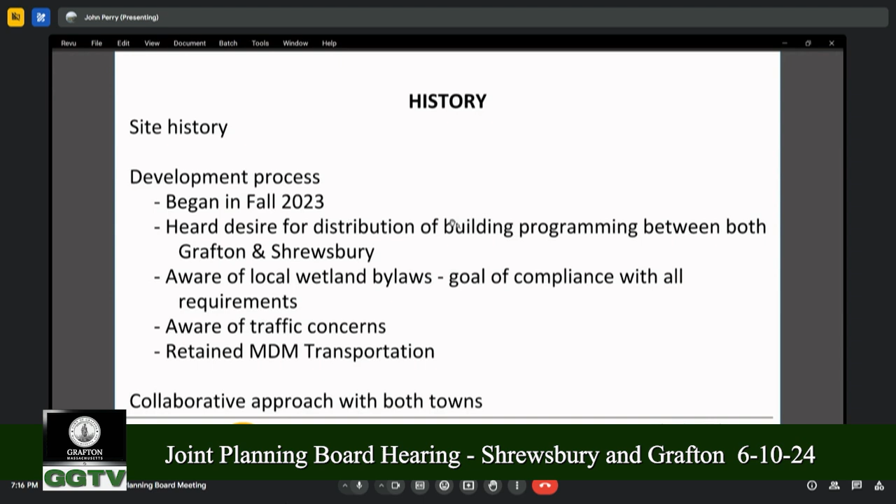So we have been working since the fall to try to meet those concerns in some fashion. As a result, we've got a fairly unique shaped building. It's not your typical kind of Lego thing. It's a little bit more of a spaceship kind of building that the development team has undertaken.

We've had extensive discussions already with the shared peer review consultants of the town and with MassDOT with regard to Route 20 Centech Boulevard and our impacts upon that way.

Our development schedule is somewhat aggressive. United Parcel Service is anxious to have this facility open. We are hoping to go through this process now in a fashion, as long as it takes, in order to start site work in early 2025. The goal would be to have the building essentially occupied in phases, not to wait for the entirety of the 845,000 square feet, to begin in 2026 with full occupancy in 2028. And we'll continue to move forward in that fashion.

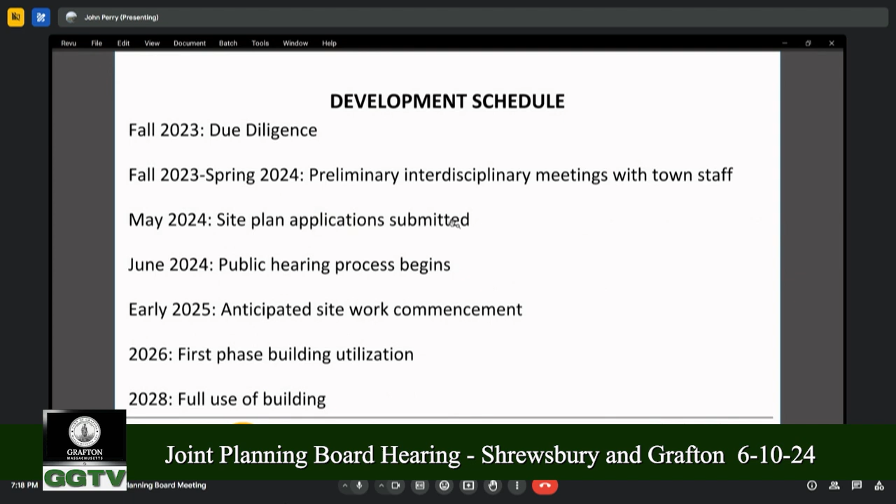The purpose of this evening is really just to get an overview, so you have the information. We'd like to hear from you and obviously from the public, any areas that you particularly want us to focus on as we move into future projects or future hearings. Anytime you're doing a development of this magnitude, the developer is critical. You need to work with credible people.

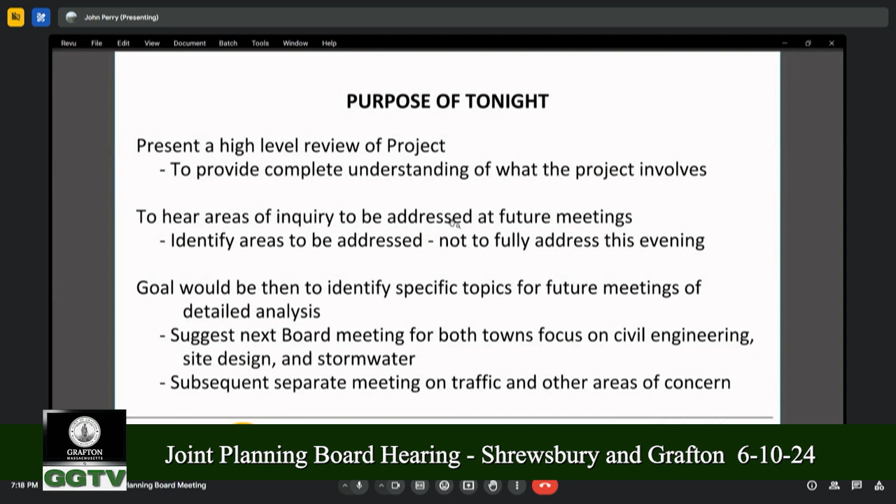And I'd like to, with your permission, have Ryan Kaminsky describe a little bit about the background of Prologis so you know the people involved.

Ryan: Prologis is a publicly traded company with outstanding credit. We currently occupy and operate in 19 countries with 25 major markets as well. Most of our customers are Fortune 500 companies, and they retain us to build consistently throughout not only the States, but globally.

Overall, we understand what it means to work with communities. You probably hear that a lot, but we've done this multiple times with a lot of our major customers, and that's why UPS retained us to get onto this project. I think what it comes down to, and Mark alluded to it, we've demonstrated over the last couple months how we've tried to lay out this property, avoiding the wetlands, and really working with UPS, going to multiple of their facilities, revising their prototype. This is significantly outside of the means of what they typically do, and there were a lot of sacrifices on the operational efficiencies here.

What you're going to see tonight from a plan standpoint is a plan that is as balanced as possible, that gets as close as possible to fulfilling the town's requests and also the operational requests from UPS. Lastly, the prototype that we have today is not ideal, really not ideal for the customer. They would have preferred the larger box that was originally presented, I believe, back in 2018. But in order to get this through and really keep it in the two towns here, this is what we're presenting tonight, which you'll see, and I'm going to turn it over to John.

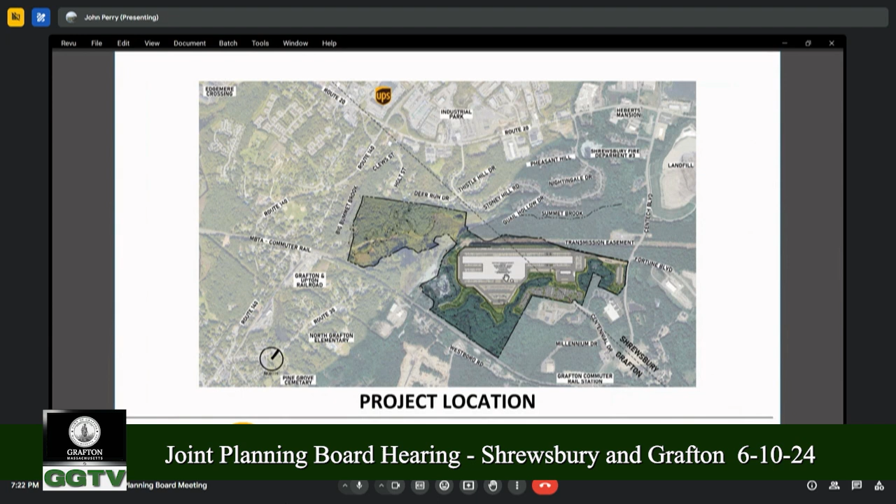So this is an existing conditions plan, and it is a challenging site. As Ryan mentioned before, we spent a lot of care making the site and the building work around the site. I'll get into that in a few minutes. But this is the development area, the thick black line is the property boundary, and these shaded light blue areas are wetlands.

So there are multiple wetlands on site, there are bordering vegetated wetlands, there's a little isolated wetland pocket here as well. This is the town line, just to give you an idea for where each item is that I'm pointing to. This red line is the town line, so north of that is obviously Shrewsbury, and south of that is Grafton.

There's an inundated area associated with Summit Brook, which comes down here and eventually flows into Summit Brook to the south. This has been inundated, and currently it's more of a pond, where the center line of the stream is more in the middle here.

This yellow line is the floodplain, so there's a 100-year floodplain associated with that. With each wetland area, there's also no-build buffers, so the purple represents the no-touch buffers of those wetlands, and the green, a little hard to see with the background, represents the 100-foot jurisdictional buffer.

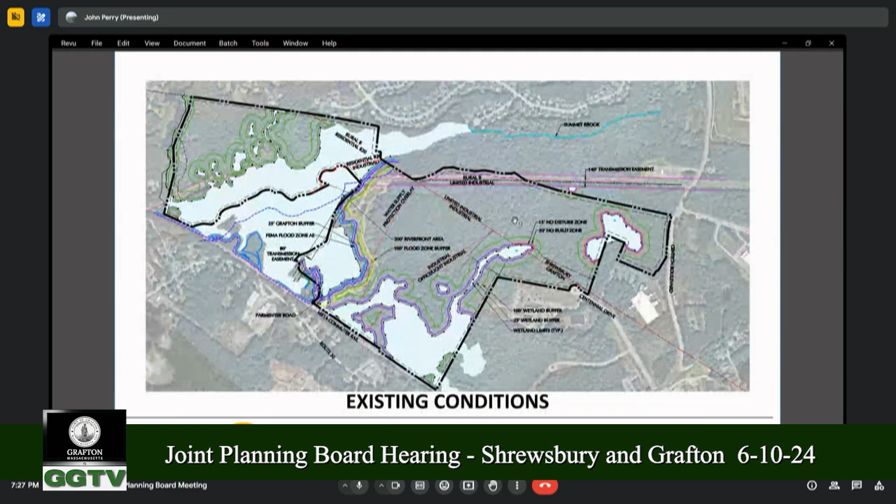As we've said a few times before, we did spend a lot of care on the site plan. Usually the building drives the site plan; in this case, it was the opposite—the site drove the building design. We worked with the tenant, UPS, the architect, and the whole team to come up with a building footprint that would work for this site. As Ryan mentioned before, this started over a year ago with a larger building that had more of an H shape to it, but it required wetland impacts and impacts to the buffer zones. We really wanted to think outside the box and come up with a better plan to eliminate any direct wetland disturbance to the bordering vegetated wetlands, and maximize open space. We think we've done a good job of doing that.

There is one small isolated wetland pocket, as I mentioned before, located on the Grafton side, that would be required to be filled in. So we're going to fill and replicate that. It's about just under 7,000 square feet. It's not jurisdictional under the state bylaws or the federal regulations—it's only a locally jurisdictional wetland, and we've discussed that with the Conservation Commission and their peer reviewer already in informal hearings. We'll get more into the detail with Conservation, which is scheduled for next Tuesday.

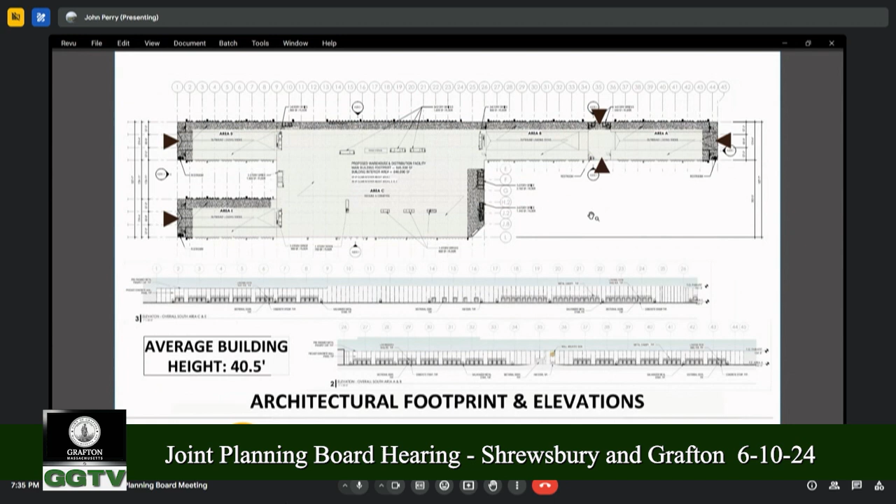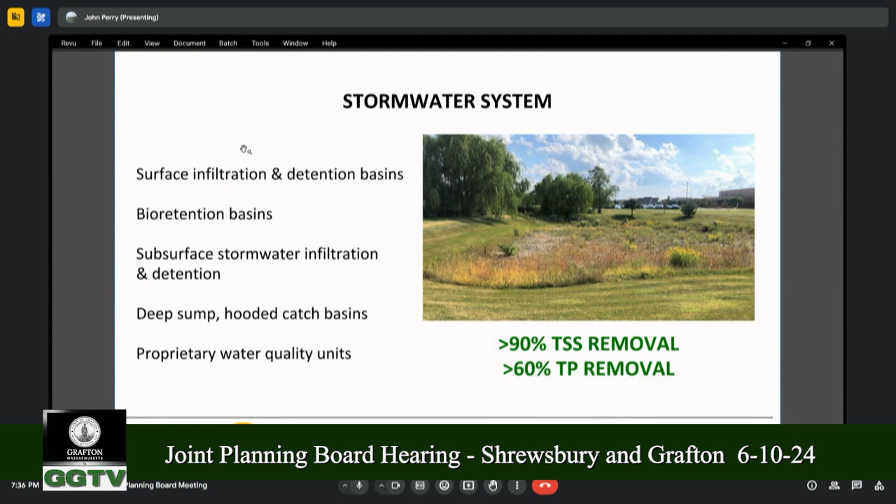Stormwater is obviously a very important component of any development, and we understand well that both towns, Shrewsbury and Grafton, have a local stormwater bylaw with a higher treatment requirement than the state standard. So we're meeting the 90% total suspended solids removal and 60% total phosphorus removal. We're doing that through a mixture of surface infiltration basins, extended detention basins, bioretention areas, otherwise known as rain gardens. We also have some subsurface infiltration and detention in the typical deep sump hooded catch basins and water quality units. We're also meeting all the peak flow rates we need to, and we'll get way more into the weeds on that in subsequent hearings.

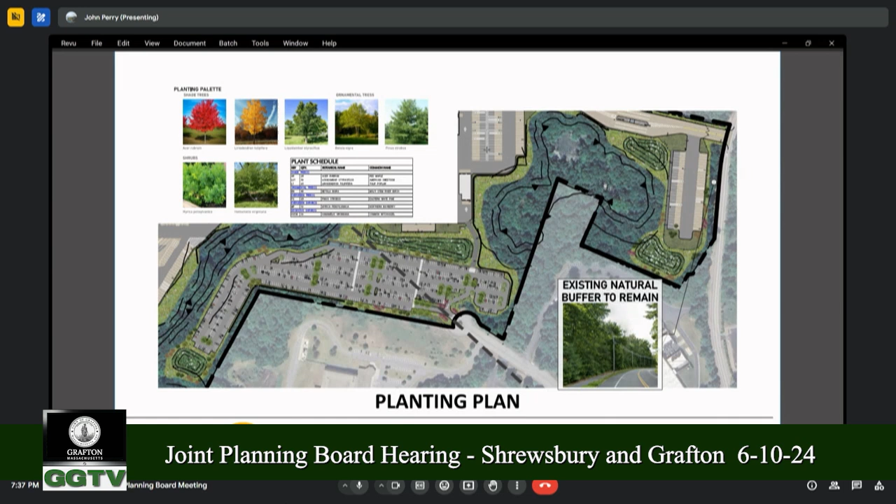And with that, I will hand it over to Bob to speak about traffic. Let me just tee Bob up.

In 2018, when United Parcel Service was looking at the site, part of that diligence involved a deep dive into traffic and understanding the permitting. As part of that diligence, UPS met with MassDOT and had specific meetings with Shrewsbury, so they certainly knew about the issues perceived out there. The Route 20 corridor plan, which MassDOT completed covering Shrewsbury from Worcester to Northborough, contemplated the UPS building off Centech Boulevard at the Route 20 intersection. So it's been on the radar for a while, and for all the reasons I indicated, we've retained MDM and Bob Michaud to review it.

So Bob? Great, thank you board members. Again, for the record, Robert Michaud, Managing Principal of MDM Transportation Consultants. As both boards are aware, we've had vast involvement in projects, both from a peer review perspective as well as representing specific developer-sponsored projects.

The outcome of some of that work is in fact now incorporated into the master plan of Route 20, portions of which have either recently been completed in the Edgemere area, in the westerly portion of Route 20, or more recently, the allocation of almost $20 million to the easterly portion of Route 20 from South Street to the Northborough line. So we're very familiar with the history and evolution of the corridor, and on the Grafton side, we are well versed on the Route 30 corridor issues, having done peer reviews there as well, and mixed-use development peer review at Green Street.

What I'd like to do is, at a very high level, knowing that we're going to go into a lot more detail in a subsequent meeting with both Shrewsbury and Grafton, is just hit the very high points of what we've determined to be the impact for this project.

I will foreshadow that by saying we have been actively engaged in discussions with MassDOT to ensure they're aware of the project. Mark had alluded to some prior discussions with DOT beginning in 2018. There's been a whole evolution of projects along the Route 20 corridor, and an evolution of this very project, which required a refresh to understand where we are today in terms of ground conditions, traffic operations, and actual built or planned projects, including this one.

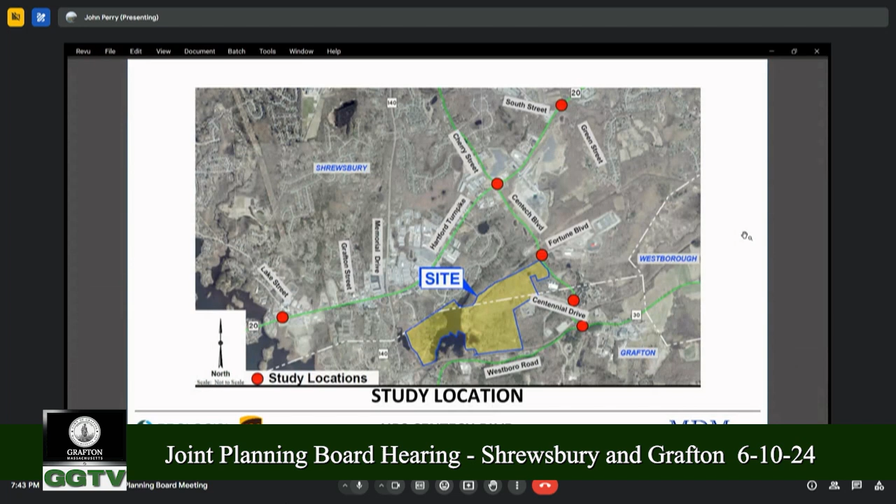And John, if you could advance one slide. The context of this is important to understand.

What's not yet funded or specifically planned is the central corridor of Route 20 in the Centech vicinity. So we spent a lot of time understanding how that currently functions and what its needs are, not only from today's perspective, but from the perspective of other projects likely to be built, either because they've been recently improved or are in the planning process.

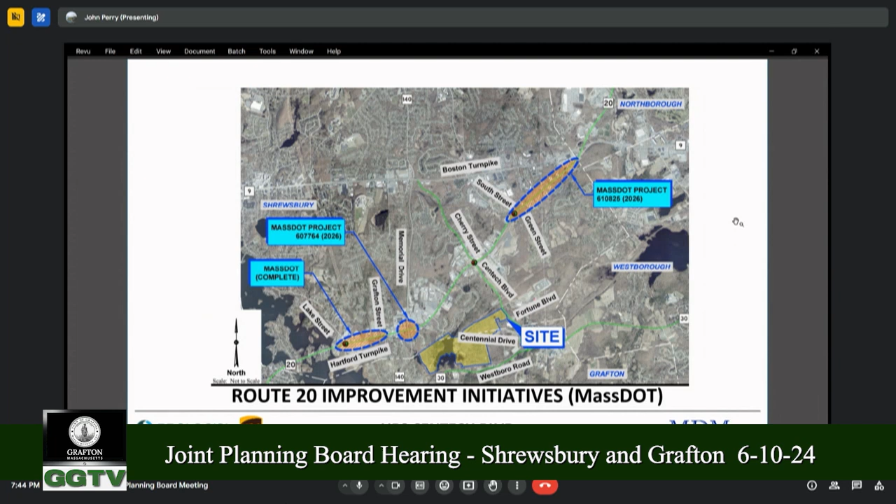The next slide will illustrate some of those projects considered in our study as we tried to frame the issue for that primary impacted location of Route 20 and Centech Boulevard, as well as projects on the Grafton side, on the Route 30 side. You'll see that there are a number of projects.

On the Grafton side, we've got an industrial development at 124 Westboro Road, the GFI project, 200,000 square feet of industrial development just west of the southerly gateway intersection. Two residential projects in Grafton at Institute Road and Afonso Village. And finally, a mixed-use development very close to the property, almost directly opposite the Grafton MBTA station, a large mixed-use development.

On the Shrewsbury side, we've got Edgemere, which is substantially complete now but has a balance of 50,000 square feet of retail space yet to go. The Pointe at Hills Farm, a combination of industrial and residential use. Centech Park North, which we've actually worked on for the town of Shrewsbury, immediately north of this property along Route 20, and the Emerald Run 40B project along the Green Street corridor.

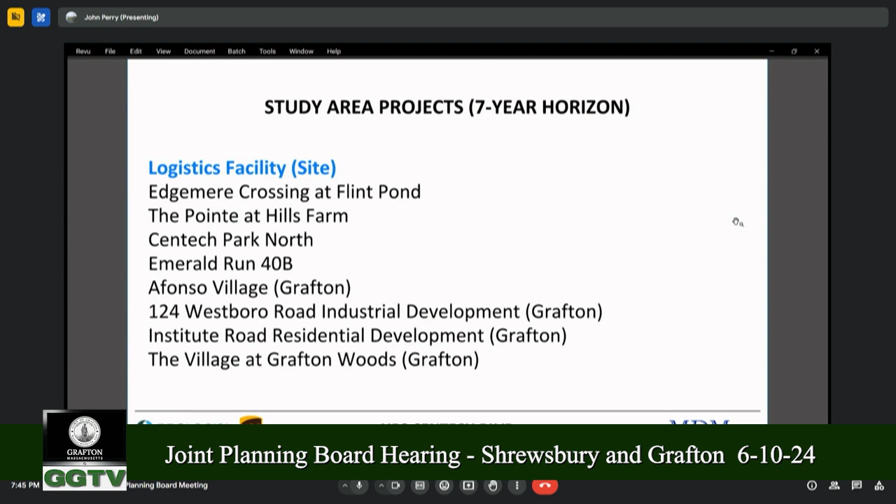So these projects are very much in the mix. These are real projects, either in process, recently approved, or recently built, all of which will place additional traffic pressures on Route 20. The next slide will show the proximity of those various projects to this site as well as to the principal impacted location at Centech Boulevard, Cherry Street, and Route 20.

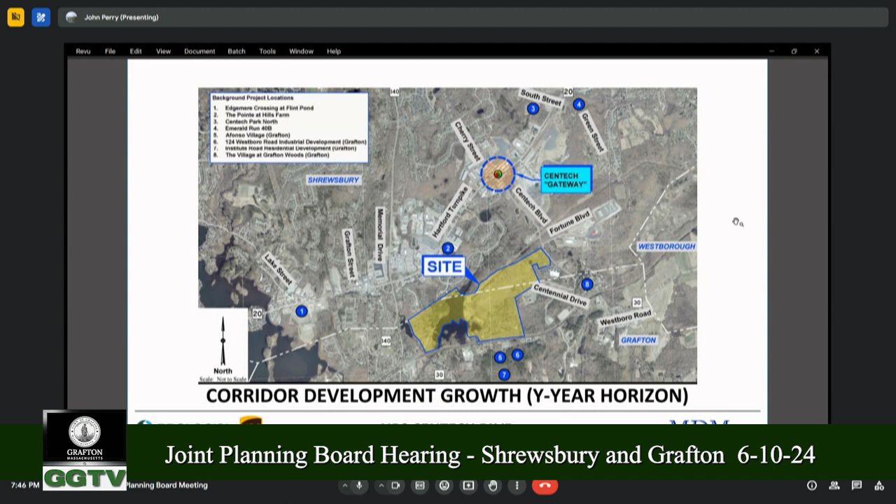The next slide shows the weekday evening equivalent, the evening commuter hour. You'll see that the volumes are even larger for these projects: about 117 additional through vehicles traveling west as they return to the local community, 82 traveling east, almost 60 on Centech Boulevard, and 12 on Cherry Street. So these are the volumes that we know, independent of this project, are going to place additional need for infrastructure or potential improvements on Route 20 to augment those already in place or recently completed.

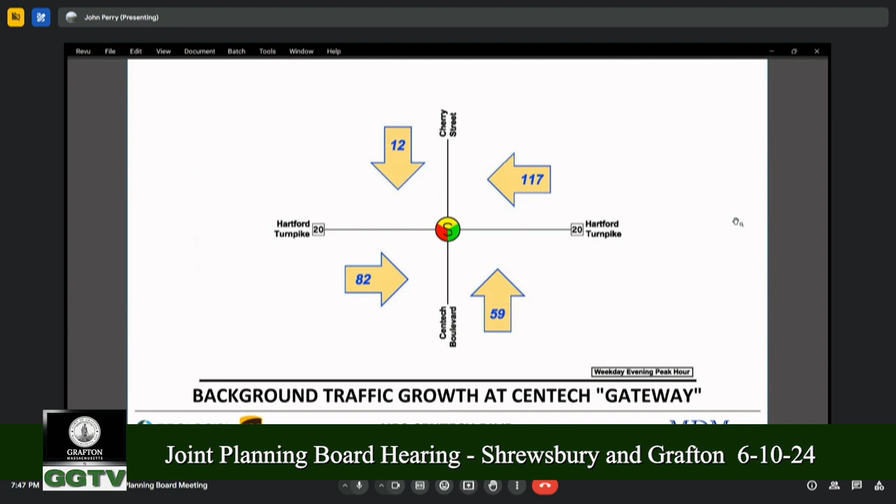So the next slide, if you could advance that, really frames some near-term objectives we've identified in discussions with Shrewsbury, understanding those additional pressures that exist independent of this project.

First and foremost, that major gateway at Route 20 and Centech Boulevard really needs to be updated to respond to these new traffic patterns. That would include a revisit and refresh of how the lanes are currently designated; they really do need to be updated to reflect these new patterns. We also need to optimize how the signal functions, since it's been some time since it was retimed to adjust to those patterns. The objective is to achieve an acceptable operating standard from the lens of how Mass DOT looks at projects and operations.

So those are really the objectives. And to achieve those objectives, Prologis has been engaged in discussions with the town to understand where the town stands in their planning efforts to address some of these pre-existing issues, and how ultimately this project may facilitate and leverage those improvements over time.

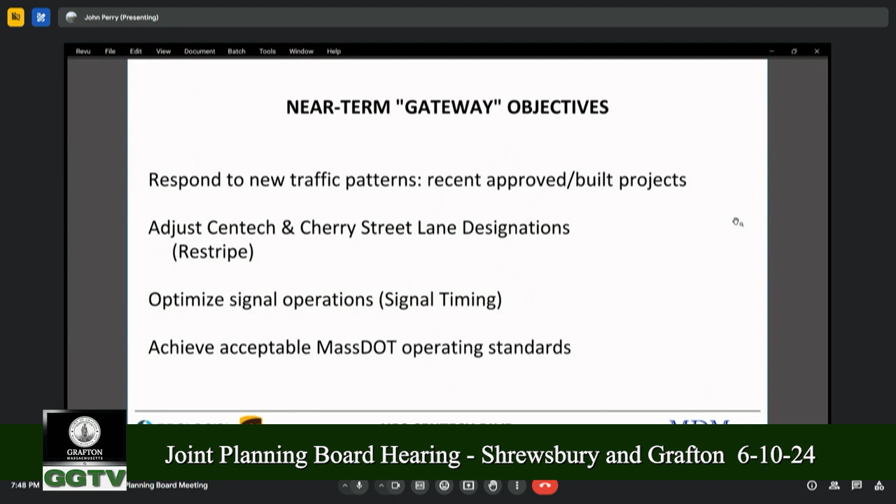So the next slide presents an overview of near-term improvements at the Route 20 and Centech Boulevard intersection. Without going into detail, since we'll have more time at a subsequent hearing, this shows the reallocation of lanes on the north-south movements, particularly for Centech Boulevard and Cherry Street, where today exclusive right turns predominate but aren't aligned with where the volume actually exists. We want to convert those right turns to through-right turn lanes, and convert what are today through-left turn lanes into exclusive left turn lanes, and retime the signal.

With those types of improvements in place, we can achieve the operating standards that DOT would consider acceptable to address those pre-existing approved or yet-to-be-built projects I just mentioned. So that's really a town initiative at this point that would be necessary to achieve that operating standard DOT is looking for.

Now, with that as a background, certainly this project is going to add its own amount of traffic, right? So let's talk about that a bit. At the next slide...

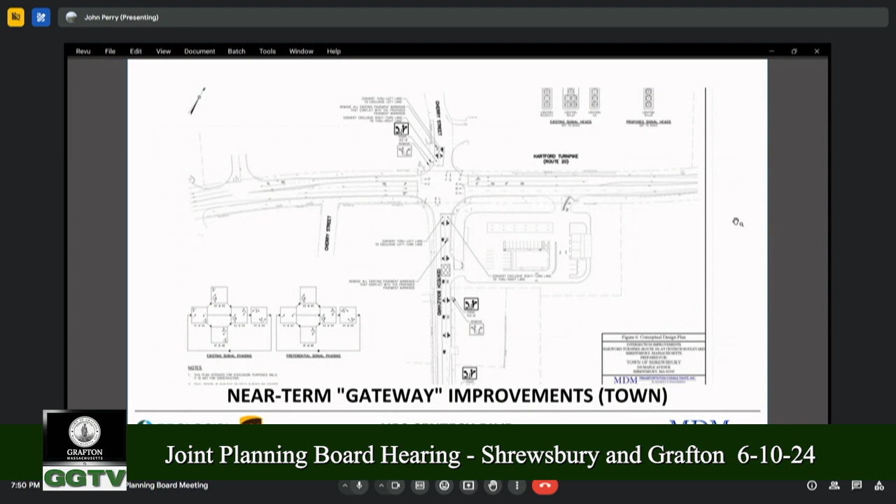There are a lot of numbers here, but what I want to impress on both boards is that industry standards are often applied to projects like this from sources like the Institute of Transportation Engineers Trip Generation Manual. That's standard protocol. But this is not a standard project, and you can't find a land use category that specifically accounts for this type of operation. In those circumstances, it's incumbent on a developer to quantify what those trips could look like by looking at similar facilities. We call that empirical evidence.

In this case, we identified, in concert with Prologis and UPS, two very recently built and fully occupied facilities that nearly mirror what's being proposed here. They're located in Salt Lake City, Utah, and Plainfield, Indiana. We've got a total of 96 hours worth of data from the combination of facilities that allow us to see, on an hour-by-hour basis, how many vehicles, trucks, pedestrians, bicycles—everything under the sun—are being generated by these facilities.

We can then apply those to this facility as a good starting point to understand how much more traffic might be generated. So what's shown in the far right of this board are the total combination of trips we'd expect during the highest one-hour period, during a commuter period in the morning and again in the evening. They're shown in blue. You'll see that in an entering movement, all vehicles coming in would total 172 total inbound trips, and under 100 leaving the facility during that same period.

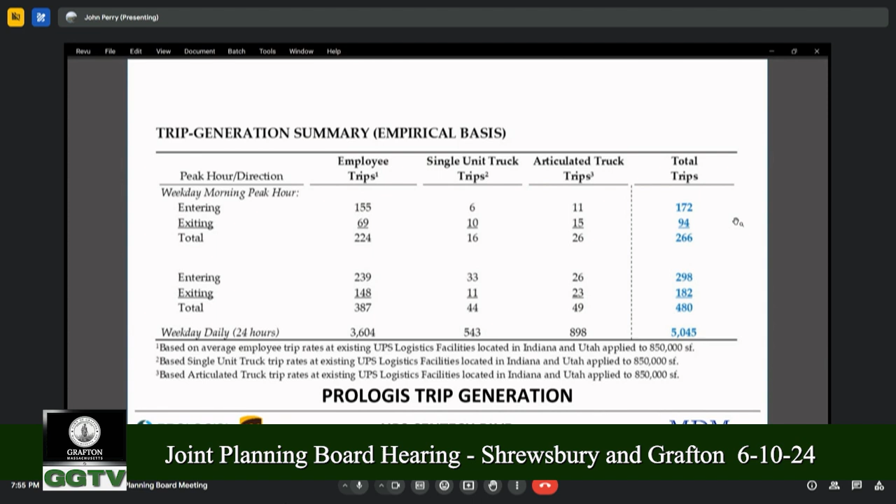To put these in context, the next slide provides a high-level volume summary of how these volumes get distributed on area roadways. You'll see the same study map I started with, but also very large yellow arrows showing the additional trips we'd expect this facility to add to various sections of road.

If you focus on Route 20 to the west, the far west, you'll see these volumes become very manageable — on the order of about 20 to maybe 30 total trips per hour by direction, and the same to the east.

On the Route 30 side, a similar story — we're talking about a peak travel direction of about 15 to 30 vehicle trips per hour on these extremities of the study area. Of course, those cumulatively will add up and impact the primary gateway at Route 20 and Centech Boulevard.

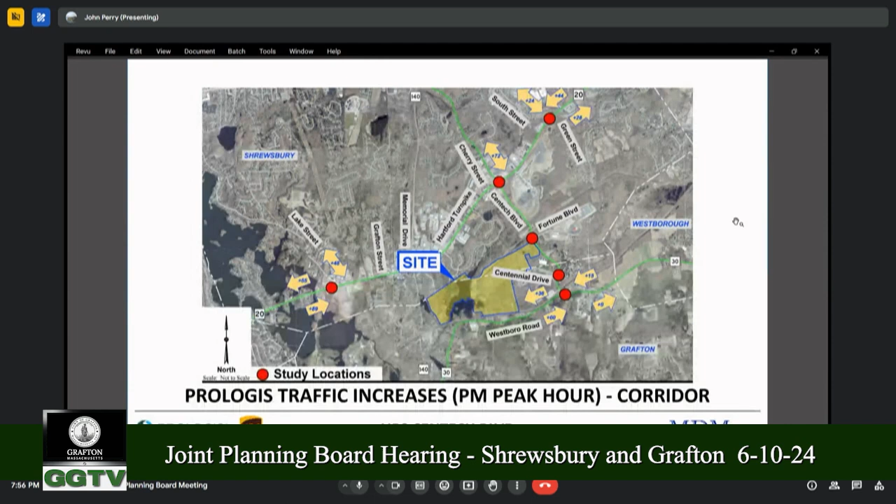If you advance one slide, there's an evening equivalent to these volumes — a bit higher, but in the same order of magnitude.

They're not volumes that are going to independently change the dial on how that signal works. They're very manageable, and in fact can be accommodated within those near-term improvement capacity enhancements that I mentioned.

The next slide is the PM equivalent. These are higher volumes, but again we're not introducing through traffic on Route 20 — we're introducing turns onto Centech Boulevard. About 120 right turns an hour traveling east, about 2 vehicles a minute, and about 60 left turns an hour, about a vehicle a minute making a left turn. 45 from Cherry Street, that's less than 1 per minute.

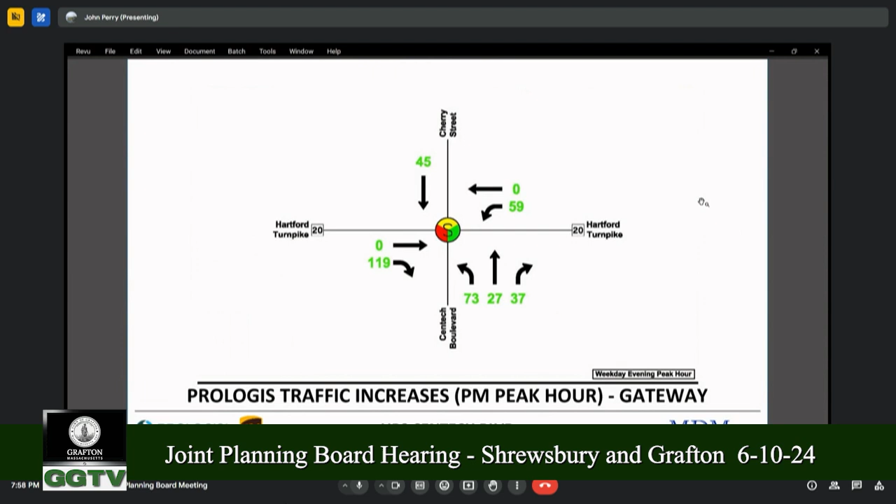When we look at vehicles trying to get back to the Route 20 corridor, the highest volume is a left turn at 73, a little more than a vehicle a minute, 27 north and 37 right turns. So very manageable numbers, and it really puts a lens on what this project is relative to other area initiatives and projects — this represents about a 5 to 10% change in the capacity of the intersection. Very manageable.

From an operations analysis perspective, we know that all of the locations we've studied currently are, or will operate, at acceptable standards as defined by industry standards.

Within Shrewsbury, that means level of service D or better operation. That is the standard that we're held to by DOT. On the Route 30 side as well, there's ample capacity to accommodate this use.

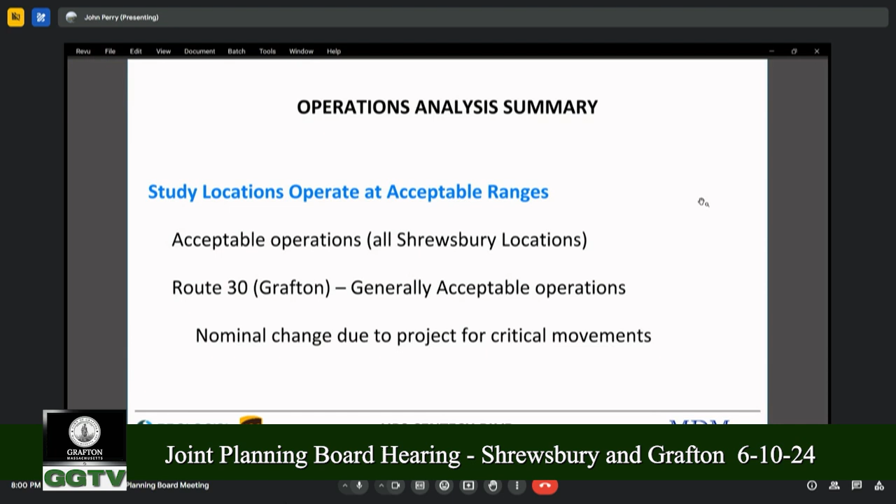We'll point out, and this was subject of peer review as well on industrial properties in Grafton, that while this project introduces a nominal change in critical movements at the intersection, there are aspects of the Route 30 intersection that have longer delays, left turns in particular onto Route 30. So we're aware of those, and in the course of a more detailed presentation, we expect to have a conversation about how that might be monitored over time and whether or not a signal at some point might make sense on the Route 30 side.

The next slide, if you could advance one more, John, provides a recap of what our current objectives are. First and foremost, as we're looking at the site and planning the site, we want to ensure safe and efficient access.

And it's in context with other industrial uses that are actually in that area. This is an industrial property. It will have separate truck access, as John mentioned, and separate passenger vehicle access. So there's a physical separation of those two aspects of the property.

Transportation infrastructure within Shrewsbury is substantially in place or being planned and is funded, but there is a need in the longer term for other physical improvements to take place, not directly related to this project, but more in line with the corridor study findings. To that end, we expect there will be additional discussion on a funding contribution by this project to help those longer-term improvements come to fruition.

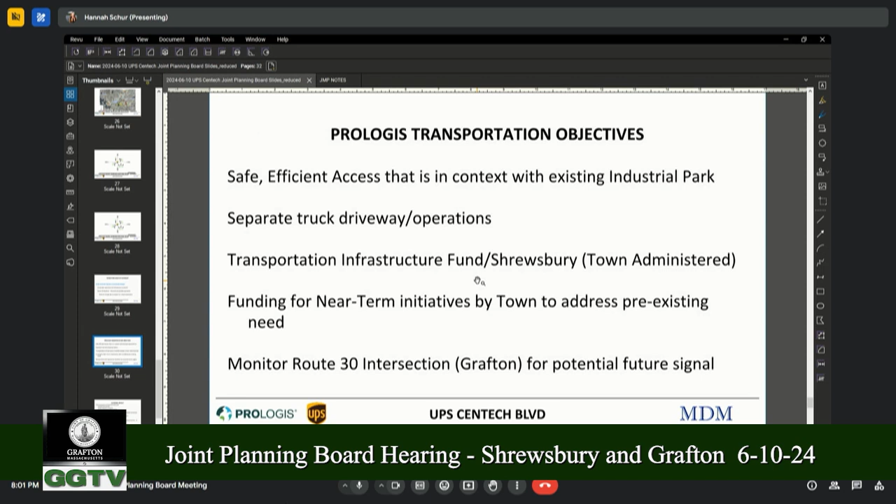And finally, I'd mentioned the Route 30 corridor and monitoring it to determine the need for any kind of signal control over time, that may be an outcome not only of this project but a number of projects cumulatively adding up. All right, so that's the general overview, very high level. Didn't want to bore you with the details. More to come. Back to Mark.

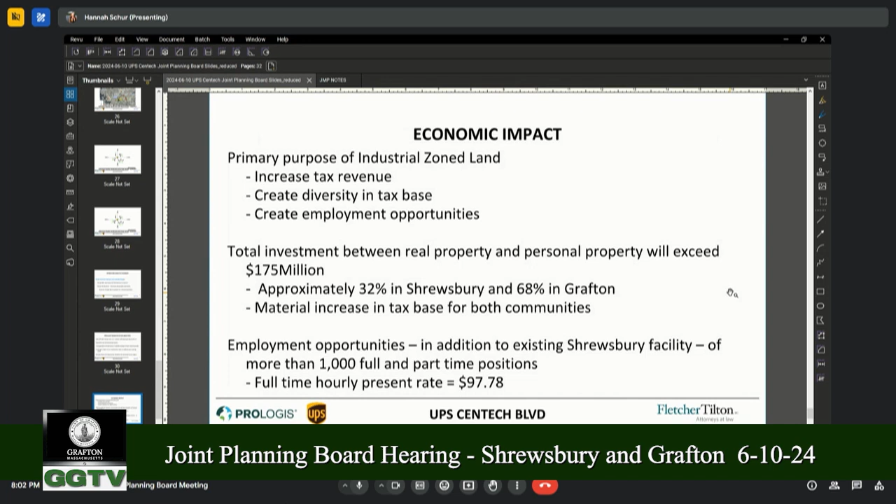So just touching on some issues outside of the direct technical points, focusing particularly on the economic impact of the site. The purpose of having industrial zone land in a community is to increase the tax revenue of a town and create diversity in a tax base so the town can benefit year over year. It's also to create employment opportunities. This project touches all of those bases, plus some.

On a conservative basis, the total expenditure by Prologis and United Parcel Service will exceed $175 million in either building or personal property within the building. We have already had initial discussions with both assessors about a collaborative effort on assessment of that property and valuation, and then each town would apply their own applicable tax rates to the portions as ultimately determined. So it is a recurring, continual, material increase to the tax revenue for both communities.

The employment opportunities are also significant. United Parcel Service expects, in addition to the Shrewsbury facility, to generate more than 1,000 full and part-time positions when full operation of the building begins in 2028 and thereafter. There may be a perception that many of those are low-level positions. That's far from the case.

It was a fairly publicized effort with the Teamsters to come to a new agreement last year with United Parcel Service on that. United Parcel Service has indicated that their full cost of employment for a full-time hourly employee exceeds $97 an hour, the vast majority of that being in wages. So these are good jobs.

Anecdotally, I can tell you that almost everybody I've talked to at United Parcel Service at this level working on this, including the regional head in Eastern United States for real estate, began at UPS on the line in some fashion. So it is a place that people have benefited from for a number of years in Shrewsbury and would continue to benefit from. That's our high-level overview of the project.

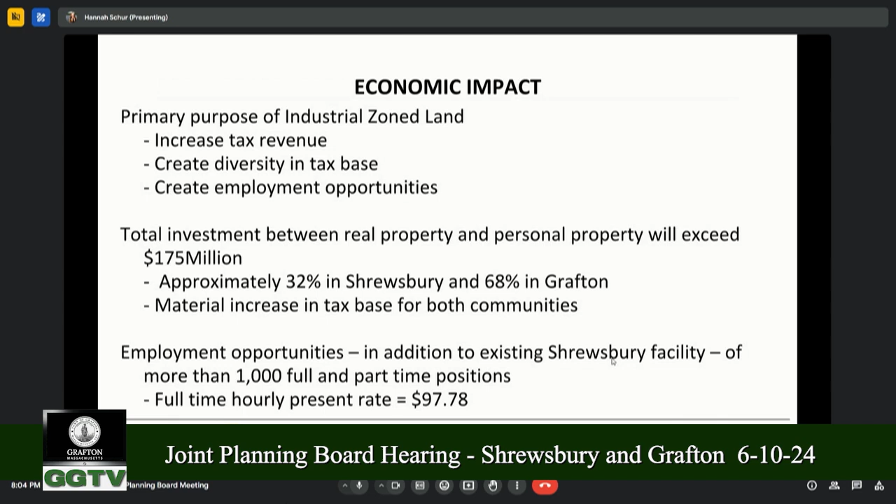We do suggest that moving forward, whether it's continued joint meetings or separate meetings, that each meeting have a particular topic so we can focus on that. We can make sure peer review's ready to focus on that to make the best use of your time, most efficiently.

We benefit from your staff, both Mr. McGoldrick and Mrs. Coughlin have been very cooperative. We now have peer review consultants involved. They, in fact, have been involved even as we met on 30% design reviews with each town staff, including public safety, to make sure that we had incorporated in the final plan initial comments and concerns. And peer review consultants have been involved in all of that.

We have submitted, obviously, Mr. Michaud's report. We've submitted the stormwater report, the plans, and everything else. To come is a sound analysis, which is still coming.

We would expect that the towns would share in a peer review consultant of that work once it's prepared, and be able to review all of that work in the future. We look forward to working with you in whatever format works for the board. I can assure you it'll work for the development team. We're glad to hear of any particular concerns you want us to address. Thank you very much for your time and effort.

Before I open this up to everybody else, if UPS wants the configuration the way it originally was, and they want to put it in Shrewsbury, we're all for it. Okay, so, Mr. Chair?

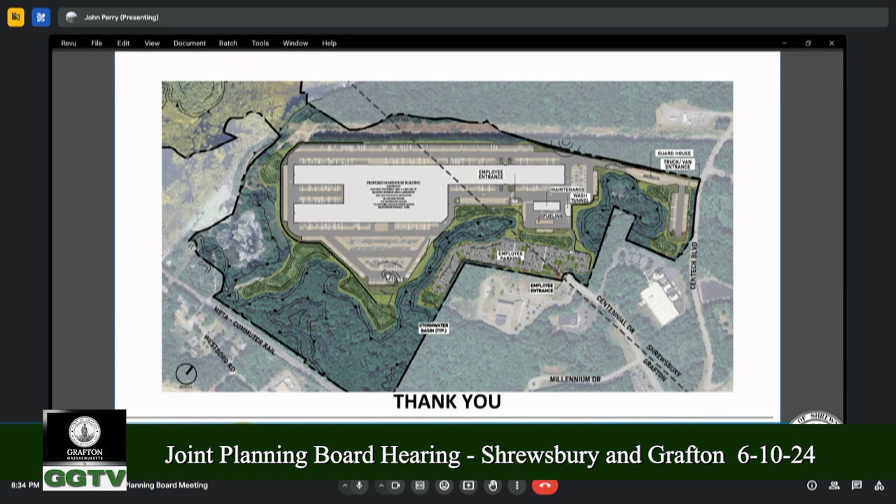Thank you. Yep. Any other board members?

I just wanted to say, I heard at the beginning we were talking about waiving or giving relief on height, and there was talk of 40.5, but then more recently I heard average was 40.5, and I want to know what the greatest height is. Absolutely, yeah, we'll be able to walk through the entirety of the facade of the building and show height all the way along.

Anyone else? No? Ms. Coughlin, you have anything on that? Mr. McGoldrick? Nothing this evening.

Okay, so this is a public hearing. Obviously for the people in the audience, you note that we don't have a lot of information, so I think questions are going to probably have to be high level because that's the best we're going to get. But does anybody have any questions or comments they'd like to make tonight?

Oh yes, ma'am, could you come up? May I approach? Thank you. Yes, please.

Good evening, my name is Angela Achu. I'm a longtime resident in North Grafton. I'm proud to say my family has lived in Shrewsbury and North Grafton for more than 100 years. I am a proud resident at 30 Nelson Street. This property has been in my family for the past 70 years. On that street, many of my family—great aunts, great uncles, cousins, relatives—live. As a child, I'm 49 years of age.